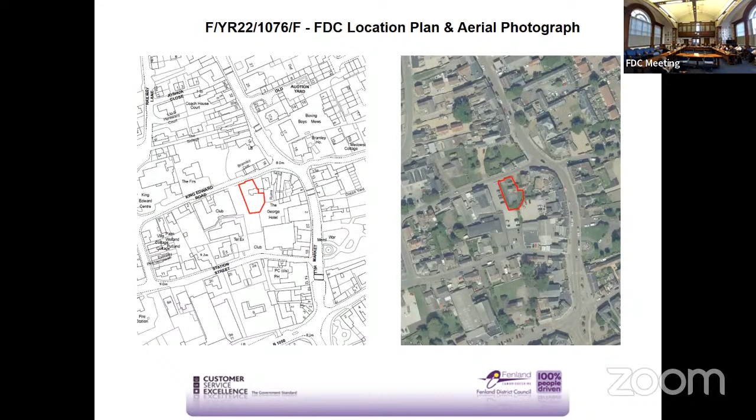It is located in the centre of Chatteris on the southern side of King Edward Road, adjoining the conservation area and within the setting of a number of listed buildings. The former dilapidated barn has been demolished and the site cleared. King Edward Road is narrow and there are double yellow lines preventing on-street parking.

Proposed site layout can be seen on this plan. The dwellings are set back behind parking spaces and therefore significantly behind the established building line on the southern side of King Edward Road. The application incorporates an area of land within the existing boundary treatments, but outside the proposed gardens. This is shown in orange and is indicated as being retained by the applicant to allow access to boundaries and other properties.

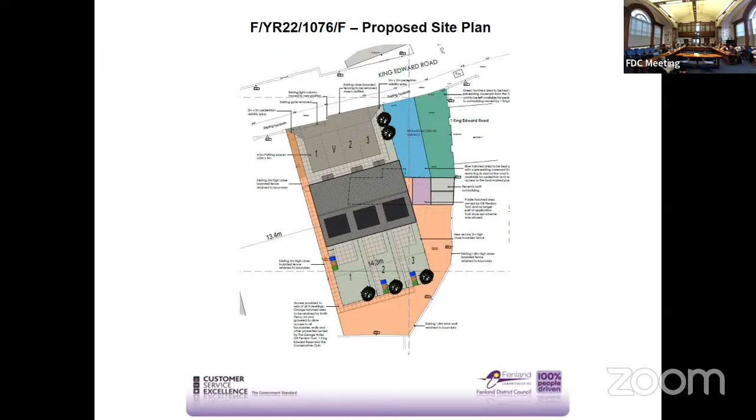Proposed elevations are detailed on this plan, and the proposed floor plans here. A proposed street scene has been submitted detailing the dwellings in relation to 1 King Edward Road to the left and the Conservative Club to the right. It should be noted that the proposal is higher than number 1, and previous schemes have been successfully negotiated to reduce the scale of frontage development.

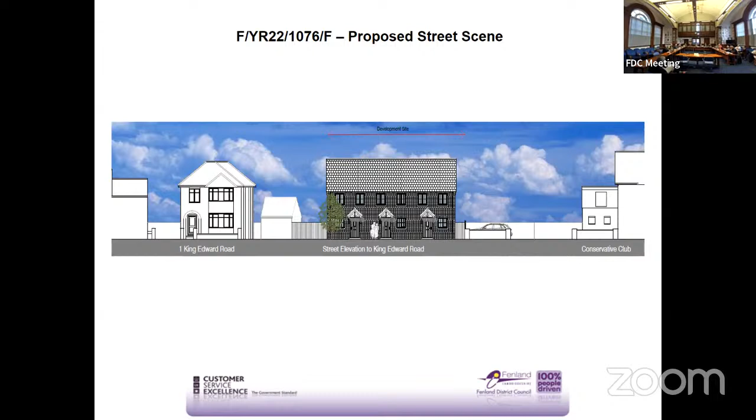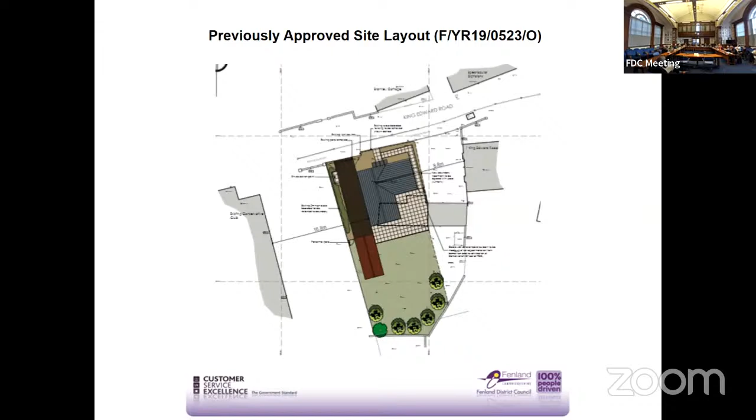The layout of the previously approved outline planning permission is detailed here, indicating an acceptable scheme for redevelopment of the site can be achieved.

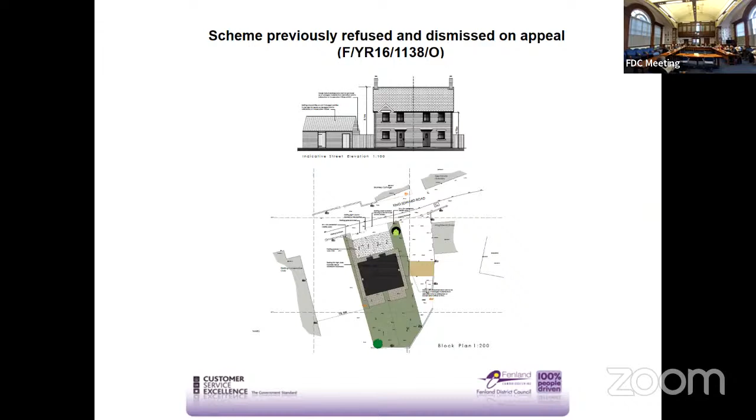This is the most comparable previously submitted scheme, which was refused and dismissed on appeal on the grounds that the loss of boundary treatment and sense of enclosure to the lane and the dominance of parking for 4 cars on the open frontage of the site would materially harm the character and appearance of the conservation area and setting of listed buildings. A comparison between that scheme and the current submission can be seen here.

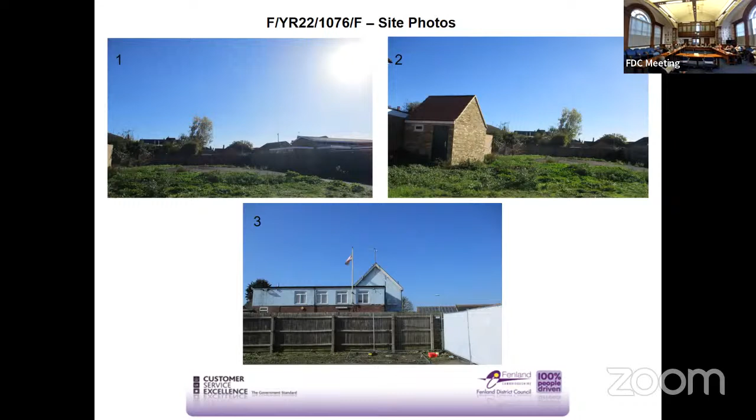Photo 1 shows the western side of the site. Photo 2, the brick outbuilding and its relationship to the site. And photo 3, the side elevation of the Conservative Club viewed from the site.

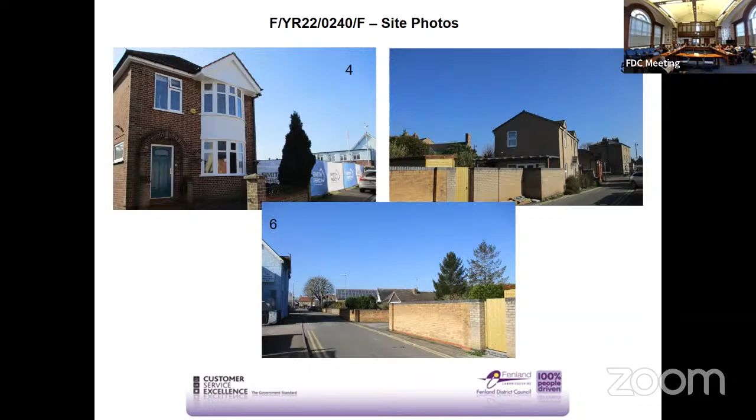Photo 4 shows the site between existing buildings. Photo 5, Bramley Cottage on the opposite side of the road. And 6, the narrowness of King Edward Road and its character of boundary walls.

The principle of development is supported and established, and redevelopment of the site has the potential to have a positive impact on the character of the area, subject to a suitable scheme being put forward.

However, the proposal results in a parking-dominated, open-fronted scheme, which would disrupt the flow of the prevailing frontage development and the sense of enclosure along King Edward Road, and introduces a scale of built form not in keeping with the area, which will materially harm the character and appearance of the conservation area and the setting of nearby listed buildings.

Furthermore, there is an under provision of on-site parking. The recommendation is therefore one of refusal, as set out on page 43 of the agenda.

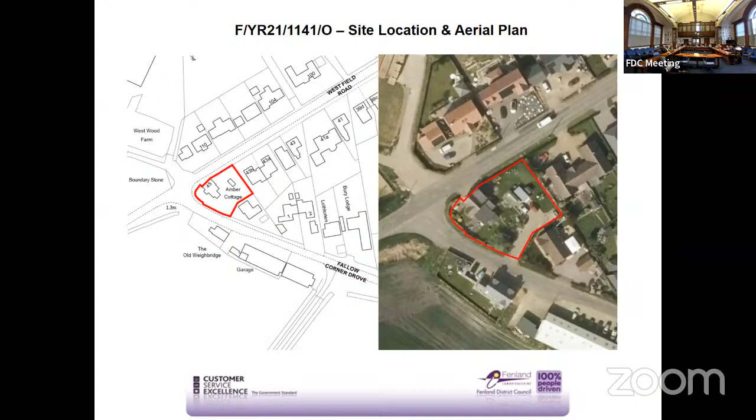The slide currently on display shows the existing dwelling and its detached garage in both plan and aerial view. The proposed scheme is illustrated on the current slide. This is an outline planning application with all matters reserved, but it is clearly demonstrated that the site can accommodate the quantum of development proposed. The current slide shows the existing dwelling and associated land.

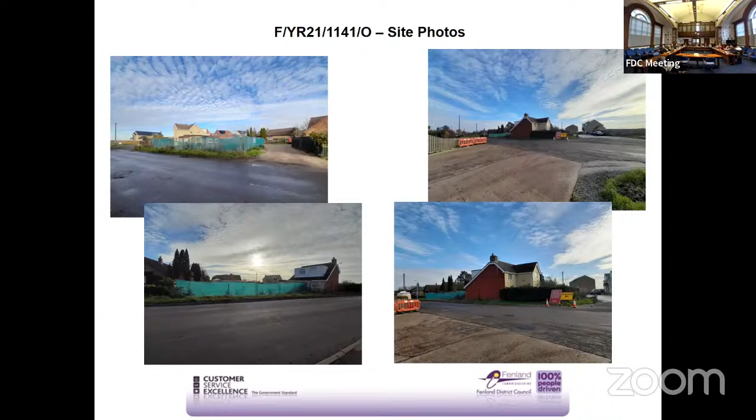The upper left-hand image shows the view from Fallow Corner Drove with the existing access to the southwest of the dwelling. The right-hand images show the site from Westfield Road taken from the access to West Wood Farm. The lower left-hand image shows the site frontage to Westfield Road. As can be noted from the officer report, it is accepted that the site could accommodate the level of development proposed when considered in terms of character and residential amenity, subject to detailed design.

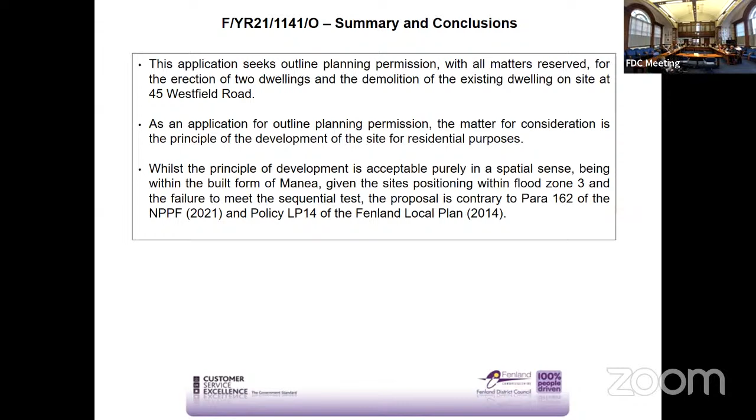However, the site is located in flood zone 3, and accordingly it is necessary to demonstrate that there are no sequentially preferable sites which could accommodate the development. In the case of this application, the sequential test has not been satisfied, as there are extant consents in areas of lower flood risk within the settlement of Manea which can accommodate the additional dwelling proposed by this application. As such, the proposal is recommended for refusal in line with both local and national policy.

Thank you, Chairman. Yeah, thank you, Alison. We have one speaker on this application. I'd now like to invite Ian Gowler, he's of course the agent, to make his presentation to the committee. You've got 5 minutes. Thank you.

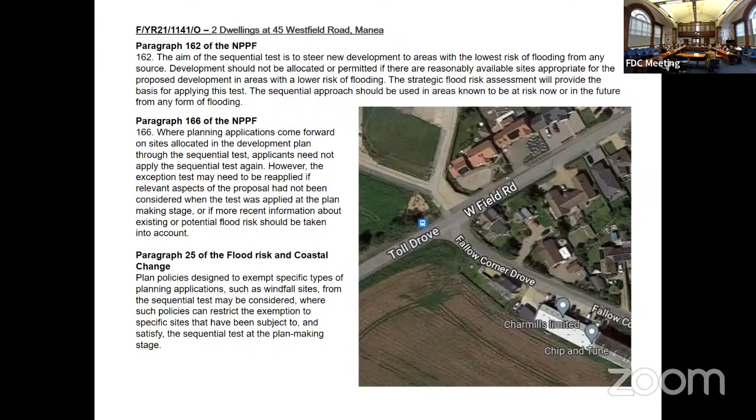This is also part of local plan policy LP12 Part A, subsection A, as an infill site. Under both these policies a sequential test would not be required, but only subject to an exception test, which was provided.

Under the emerging local plan, which is in its very early days, this site also falls within the proposed development area boundary of Manea. Under the new local plan, windfall sites would provide 1,500 homes. Although this site only adds one, they all count.

In recent years there have been dwellings approved opposite and to the northwest, both in a worse flood zone area than shown. Within the exception test we've provided, we're proposing two important items which would fall in line with the windfall guidance. These are improvements to the existing site, providing a wider community benefit. The first is to provide attenuation for the surface water from the site. At present the existing hard paving and dwelling goes unattenuated into an existing surface water drain. Obviously the new development would improve this situation.

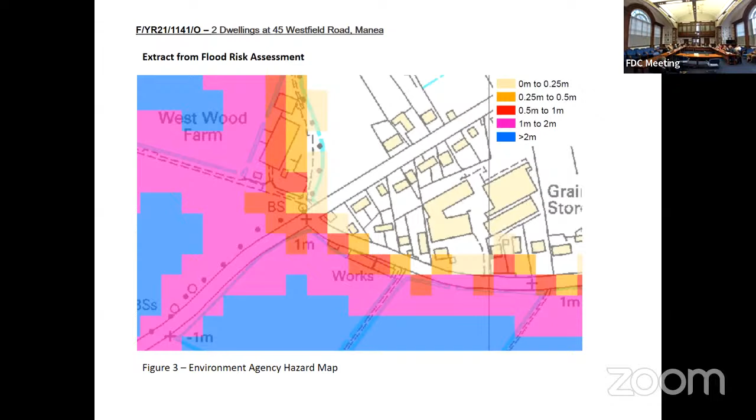Would you like to come back, Councillor? Yeah, I just would like to come back on that because, to me, that sounds ridiculous, to be perfectly honest with you. And if that's going to happen, the people that already live in those new houses will want to open their front and back doors because it will run down that road and down, it won't stop there where that building is going to be. It won't stop there at all. It won't flood there, it was way above the height of the road and going out into the countryside.

Yeah, I do tend to agree with you, Councillor Murphy, but anyway, still in debate. Councillor Sutton, thank you. Yeah, thank you, Chairman. I understand why the officers have recommended this, they have no choice, because that is what's in the textbooks. I do think this is slightly different because it's replacing a dwelling which is actually in the deepest potential flooding on the site.

I don't like the layout. I don't like the 2-story. I would prefer to see single story with perhaps some escape route into the roof space. But...

You've heard me often say about being consistent, and I think to be consistent we have to overturn officers as much as sometimes we regret doing that. We agreed for the dwellings the other side - the one that's already built, I think, was done under delegated powers, if my memory serves me correctly. And of course the one the other side of the road was also in flood risk 3, and we agreed that should go ahead because of the benefits to the business owner. So I think it will be difficult for us as members to go with the officer's recommendation on this one, given that we went against them on the opposite side of the road.

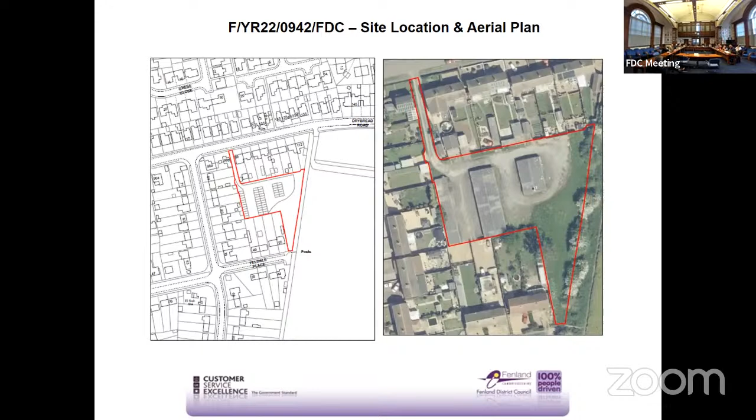The current slide details the site in both plan and aerial form. An illustrative site plan has been submitted which demonstrates how the quantum of development proposed under this application could potentially be delivered on the site. No details are, however, committed, and these would be dealt with via subsequent reserved matters should outline planning permission be granted.

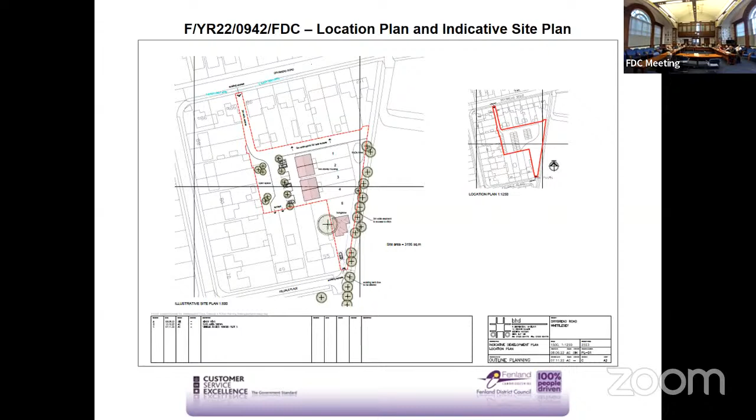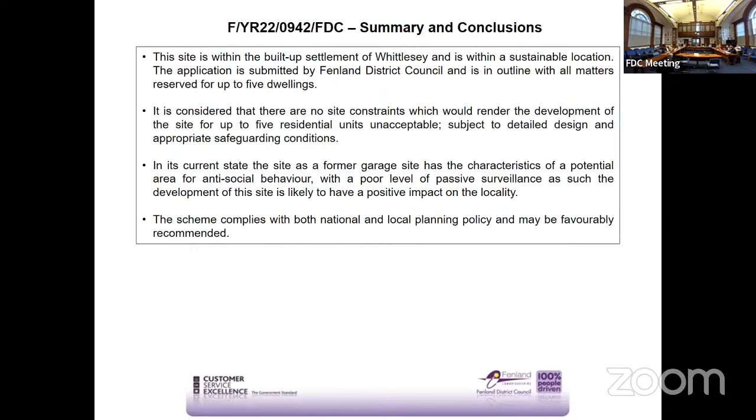The submission is before Planning Committee solely as a result of Fenland District Council being the applicant. Thereby, consideration falls outside the scheme of delegation. There are no unresolved issues that would render the scheme outside policy, and as such, the recommendation is one of grant. Thank you.

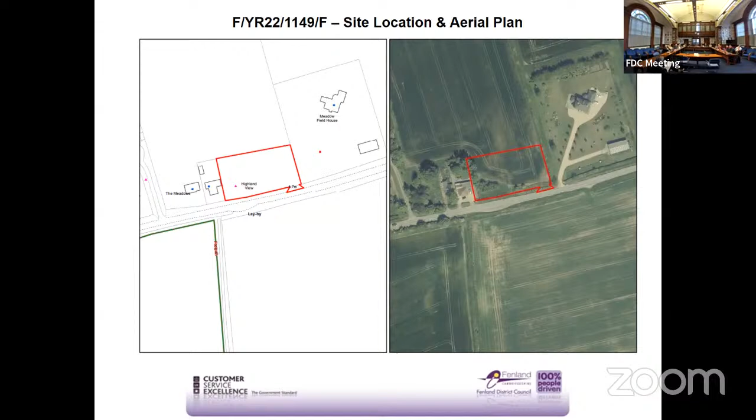The current slide shows the site in both plan and aerial form. As indicated in the officer report, the site lies approximately 1.3 kilometres to the west of Doddington within an area of open and generally undeveloped arable farmland interspersed with sporadic development, primarily the Fields End leisure tourism site and horticultural nursery, along with some ad hoc dwellings. For context, the following slide has been produced.

The application site is located at the red star, with the figure 8 to the west being the Fields End water site and the large grey structure to the east being Delfland Nurseries. Members are advised that of the approvals granted within the wider area captured on the aerial image, 4 dwellings were approved with occupancy restrictions, 3 were replacement dwellings. Permissions relating to 15D, 60 E to G and Askham Row were all committee overturns. 2 of the dwellings that were approved predate the current local plan, and 1 decision was made where weight was given to emerging policy and localism, and the absence of harm gained officer support.

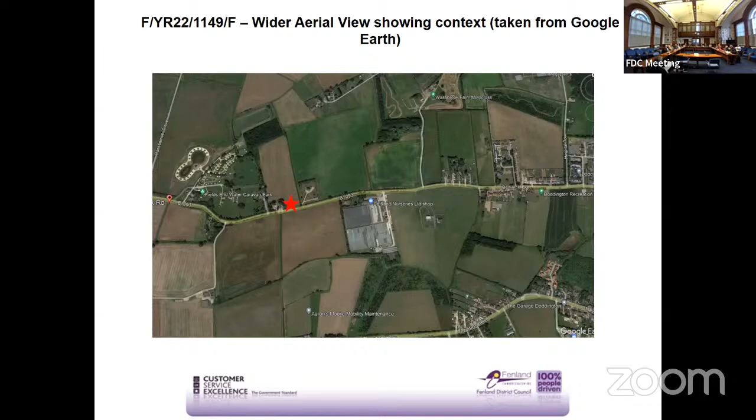The submitted application seeks full planning permission, and the current site plan shows the intended layout: 3 detached dwellings are proposed with field access to the east of the site. As indicated in the officer report, the form of development, notwithstanding that the site is an elsewhere location, would be to the detriment of the character and appearance of the area, and is also considered at odds with the dwelling known as Highland View, which would be dominated by dwellings to each side.

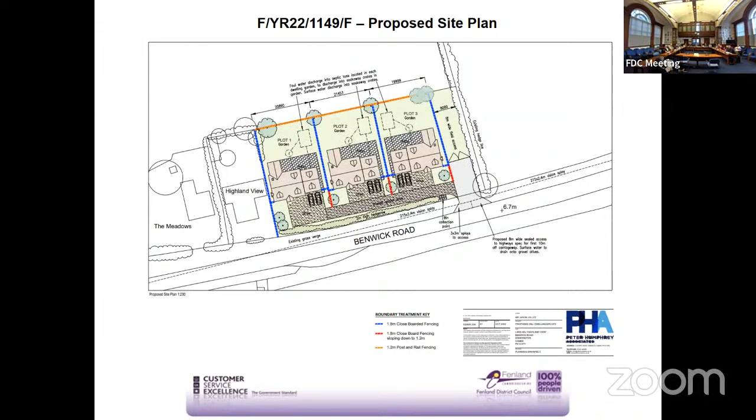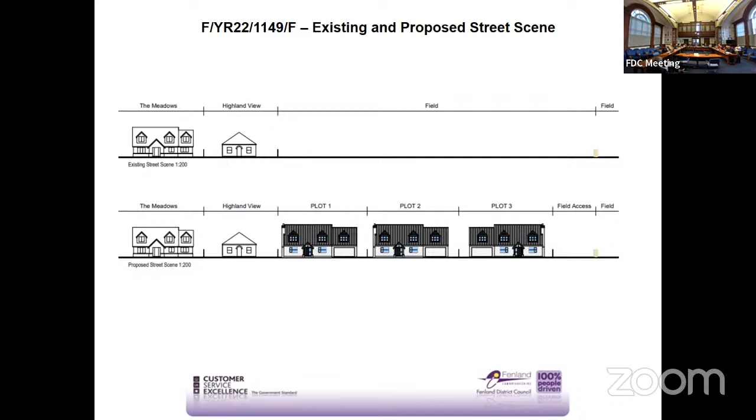The current slide shows the dwelling design, with plots 1 and 2 being as displayed and plot 3 being a handed version of the same dwelling type. This street scene view clearly illustrates the impact the development would have on the rural area in character and visual terms, and shows the dominance of the existing bungalow Highland View that would arise following delivery of the scheme if approved. The upper left-hand image shows Highland View, with the remaining images capturing the longer range view to the site frontage and beyond. Meadowfield House can be seen in the distance on the lower right-hand image.

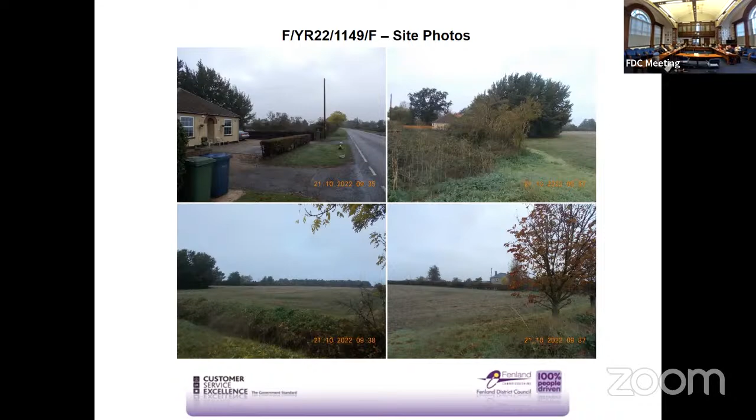To summarise, the application site comprises agricultural land on the northern side of Benwick Road, approximately 1.3 kilometres to the west of the settlement of Doddington. Apart from the occasional sporadic dwelling, horticultural nursery, and Fields End leisure and tourism site, the site is characterised by open and generally undeveloped arable farmland. This application seeks full planning approval for the erection of 3 two-storey, 4-bedroom dwellings with the formation of an access to the east side. The access is proposed to be shared by the proposed dwelling and will form a field access to the agricultural land at the rear of the site.

This proposal was preceded by an earlier outline application for a similar scheme. This was refused on the basis of the principle of development, its impact on countryside character and highway safety. That 2021 refusal went before the chairman and was refused as a delegated item. Of the 3 reasons for refusal of the earlier outline scheme, this revised proposal only addresses one of them, that being highway safety. There remain fundamental issues in respect of the principle of development and its impact on the character of the countryside, remaining in contravention with policies LP3, LP12 and LP16. Hence, the recommendation remains one of refusal.

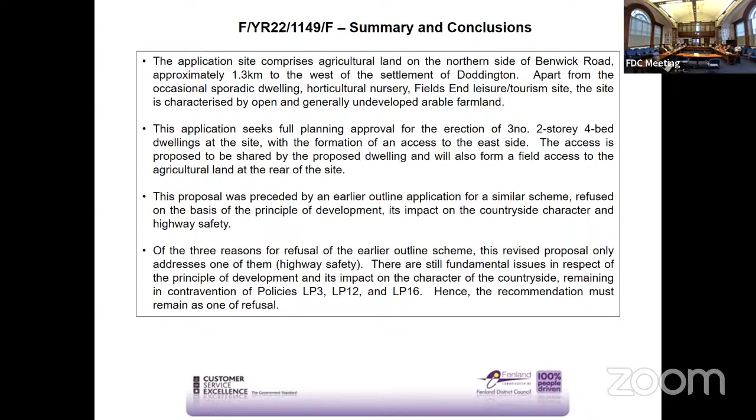Thank you, Mr. Chairman. It's good to see you all again and wish you all a happy Christmas. I'm pleased to see the application at Manea was a common sense decision - we're looking for one here. Basically, there's an opportunity to provide 3 self-built plots. We know from our profession there is a big shortage of self-built plots, and Doddington being a growth village, this will help in a small way deliver some self-built plots, because I know the client has got people wanting to buy them. The site will enhance this edge of village development, and it is close to the adjacent Askham village community and very close to a village of holiday lodges.

Whilst this may not be in the village, it is very close to an approved village next door. It has dwellings both left and right, making it very difficult to farm. Hence the reason Mr. Jolly is looking to develop the land, because it's in fact a useless piece to farm at the front. Yes, it's difficult enough at the back, but the front is small and very difficult to work.

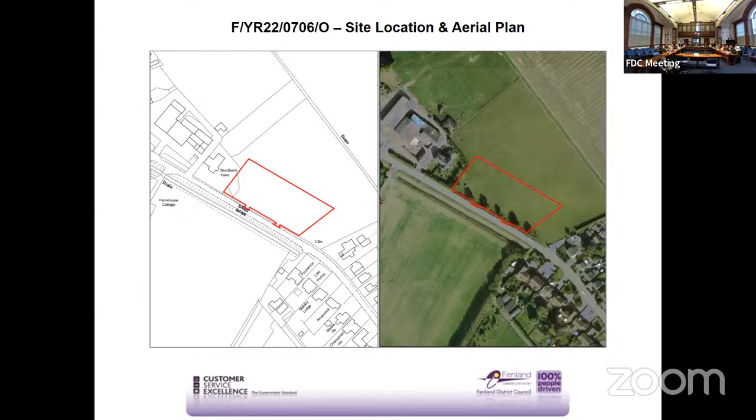An indicative site plan accompanies the application, albeit all matters are reserved for later consideration other than the access. The illustrative details show a linear development to demonstrate how the quantum of development could be accommodated. Within the officer report, context is provided, noting that the development would extend ribbon development on land that presents as agricultural and affords a natural distinction between the developed built form of Wisbech St Mary and the open countryside beyond, save for the sporadic development to the northwest.

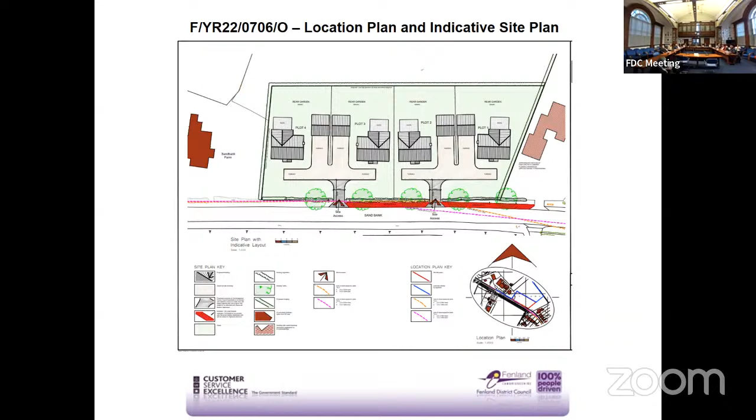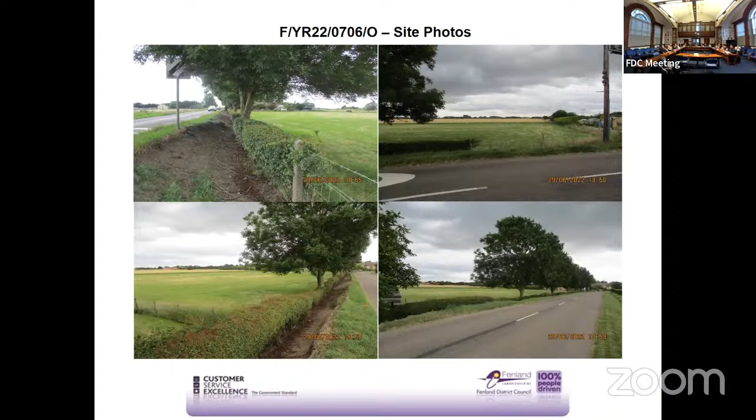In summary, the application seeks outline planning permission for the erection of up to 4 dwellings on agricultural grassland in flood zone 3 on the east side of Sandbank, Wisbech St Mary. The application commits matters of access, with remaining matters reserved for later approval.

Whilst Wisbech St Mary is a growth village as identified in policy LP3, the application site would extend the existing linear feature of the development footprint of the settlement into an area of agricultural grassland. This area of grassland at the site is mirrored by agricultural land opposite, which forms a natural demarcation between the developed built form of Wisbech St Mary and the surrounding countryside beyond. Development encroaching into this land would harm the character and appearance of the area. As such, the proposal would be contrary to the requirements of policy LP12.

Flood mitigation measures proposed the raising of finished floor levels to 1 metre above ground for the entire development, which would result in cumulative dominance of the development within the street scene. Matters relating to access have been satisfactorily addressed. However, there are still fundamental issues pertaining to the principle of development and its harm to the rural character and street scene in this location.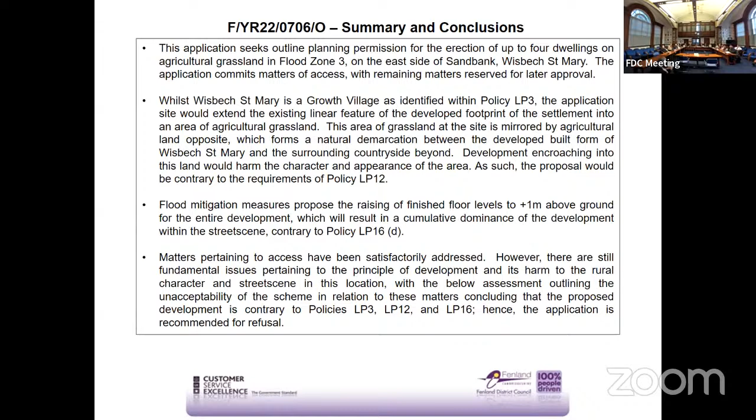The scheme is considered unacceptable in relation to these matters and contrary to policies LP3, LP12 and LP16. Hence, the application is recommended for refusal.

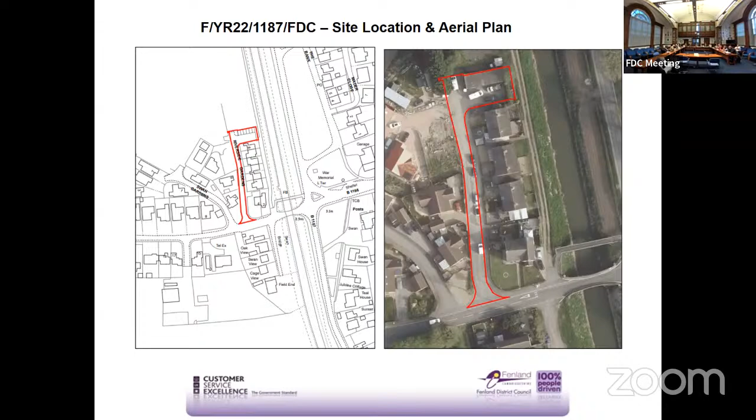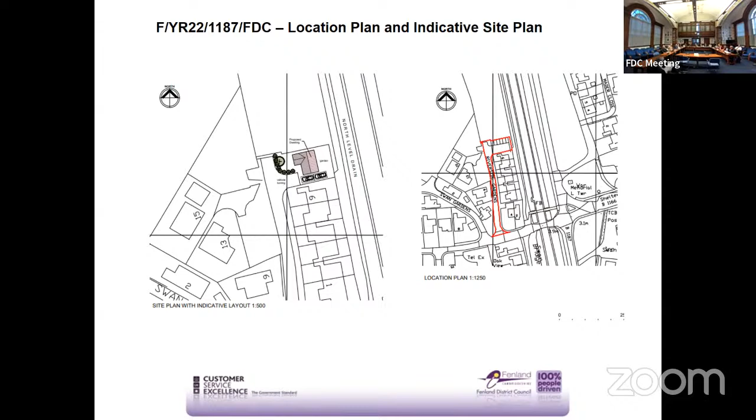This is an outline application with only access committed, with this being derived via the existing roadway, which serves the existing garages and the residential properties to the south. As indicated in the officer report, there are no policy issues arising and the site can accommodate the quantum of development proposed. Matters relating to residential amenity and design will be addressed as part of any subsequent reserved matters submission.

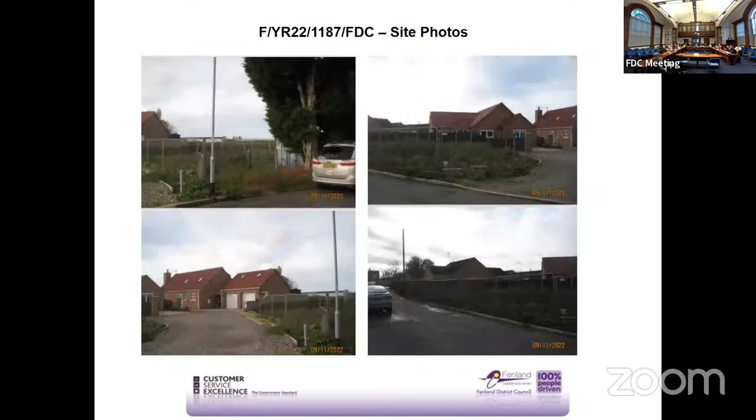These images show the development to the western side of Riverside Gardens.

In summary, the site relates to an existing garage block situated to the north of number 6 Riverside Gardens. The application seeks outline planning permission for 1 dwelling. As the application is for outline planning permission, the matter for consideration is the principle of development of the site for residential purposes. An indicative site plan demonstrates the site is capable of sustaining 1 dwelling with on-site parking and private amenity space, and there would be no adverse impacts on the character of the wider area.

Taking national and local planning policy into account and having regard to all relevant material considerations, it is recommended that outline planning permission be granted, subject to the imposition of appropriate conditions, noting the change to condition 1 proposed and the addition of an access condition to ensure delivery of the same prior to occupation of the dwelling.

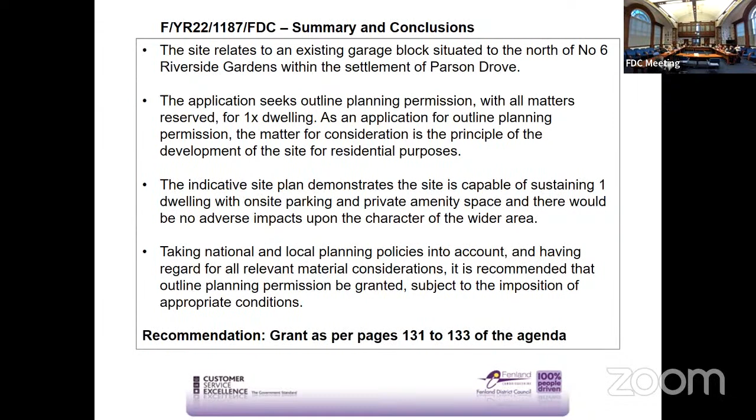Anybody? Councillor Cornwell, thank you. Thank you very much, Chairman.

When we visited the site, we hadn't actually seen the report, but we did very clearly indicate on our visit that the importance of the bottom end, which incorporates this plot, is desperately important in relation to turning and so on. It's a very narrow road. Most of the existing residents along the road seem to park on the road, so there's nowhere to turn. So whatever happens, it is desperately important that whatever is approved gives sufficient space to turn. That issue has actually been picked up by the parish council as well. So perhaps we got that element right, because we did spot it ourselves anyway. It's been further complicated probably because of the other entrance onto the road on the riverside from the other development on the other side. So I think it's important to stress that whatever we do, if we approve it, it has to incorporate very strict controls over the access and turning for the remainder of Riverside, not just this plot.

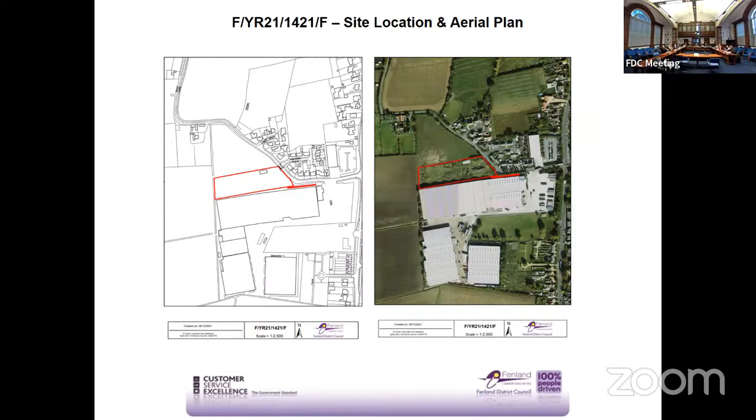2-metre fencing is to be provided to the boundary of the site, largely inside the existing boundary planting, and within the update report, members will see that there is a further condition regarding the provision of a fence to the eastern boundary, the Blue Lane boundary of the site. The hedge along the Blue Lane frontage of the site is also to be retained, and as the parish council have indicated, I would just draw members' attention to the dwellings on the opposite side of Blue Lane.

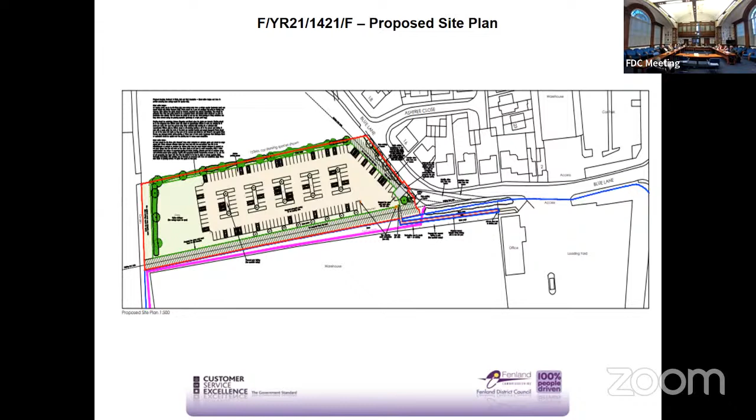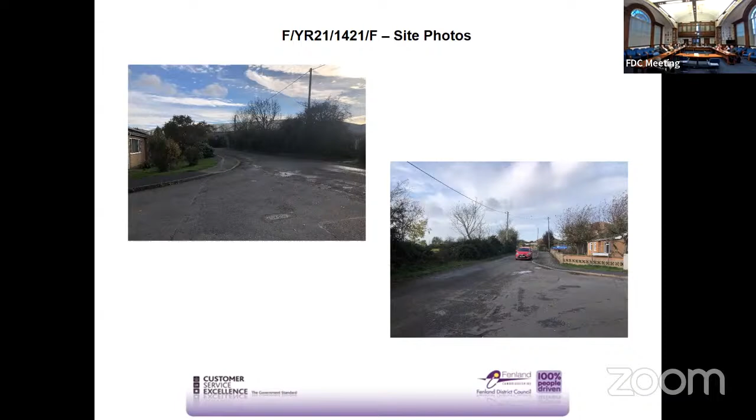It is considered that the development would impact on the amenity of neighbouring residents. However, this is not considered to be to such a level to justify refusal. There are no technical objections arising from environmental health or highways upon which a refusal could be sustained. It is not considered that the character of the area would be significantly adversely affected, and there would be some economic benefits to the business from the development proceeding.

Consequently, the officer recommendation is to grant planning permission as set out within the agenda and also within the update report. Thank you, Chairman.

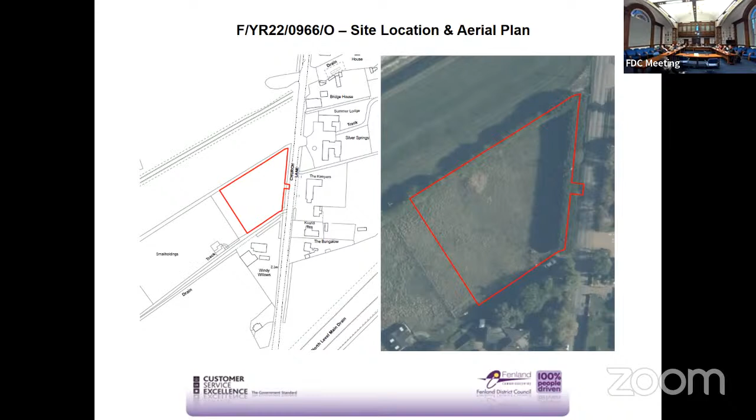The application site is shown in red on the location plan and aerial photo. It's a green field location with sporadic development in the vicinity. There have been 2 previous applications refused for 3 dwellings on the site, the most recent being at Planning Committee in 2013.

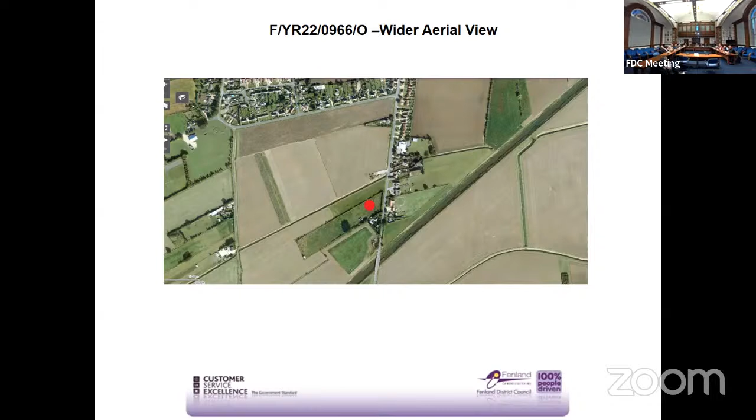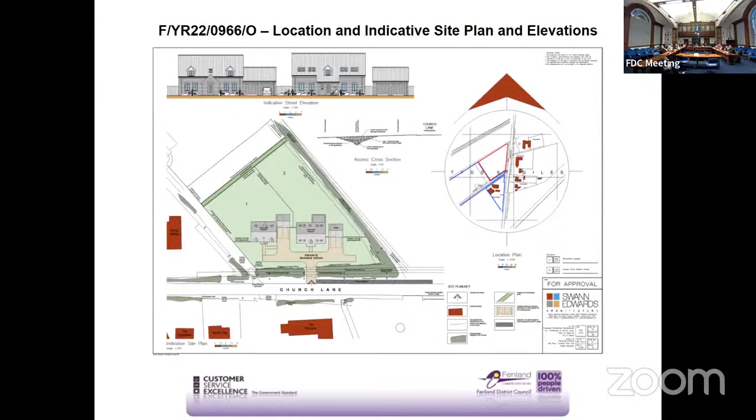To summarise, the site is considered to be outside the built form of Tydd St Giles and as such is within the open countryside. Tydd St Giles itself is classed as a small village within the settlement hierarchy of the local plan, where only small scale infilling will be allowed. The development by its nature and the nature of the site does not accord with the relevant planning policies in terms of the principle of development.

Given the nature of the site and its separation from the built form of the settlement, it's considered there would also be harm caused to the character and appearance of the surrounding area. The site is located in flood zone 3 and should be demonstrated as being sequentially acceptable. No meaningful sequential test has been submitted with the application, and as such the application fails to meet local and national policies in this respect.

In addition, the Highway Authority have commented that no details of acceptable visibility have been shown on the plan and therefore raised an issue in that regard, a further reason for refusal recommended. As such, the application is considered to conflict with a number of policies of the local plan and of the NPPF, and the recommendation is therefore to refuse planning permission as set out within the agenda. Thank you, Chair.

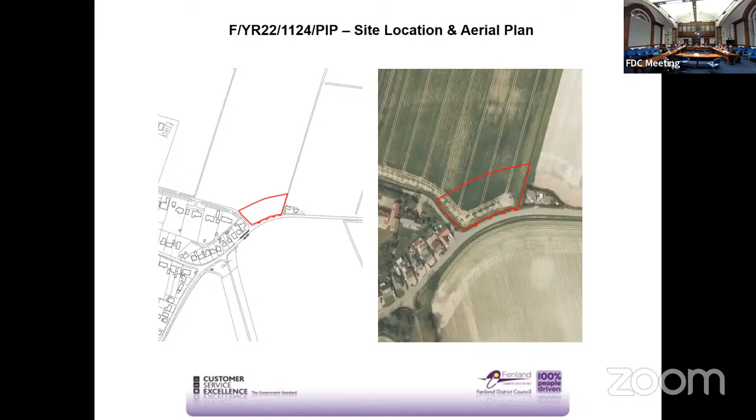Thank you, Chairman. So this is a planning application in principle for residential development of up to 4 dwellings involving the formation of 4 new accesses, land west of railway carriage, Needham Bank, Friday Bridge. The application site is shown in red on the location plan and aerial photo, forms part of a wider agricultural field at the junction of Needham Bank, and then Bar Drove to the west. To the east is the residential property of railway carriage, and a significant proportion of the site is within flood zone 2.

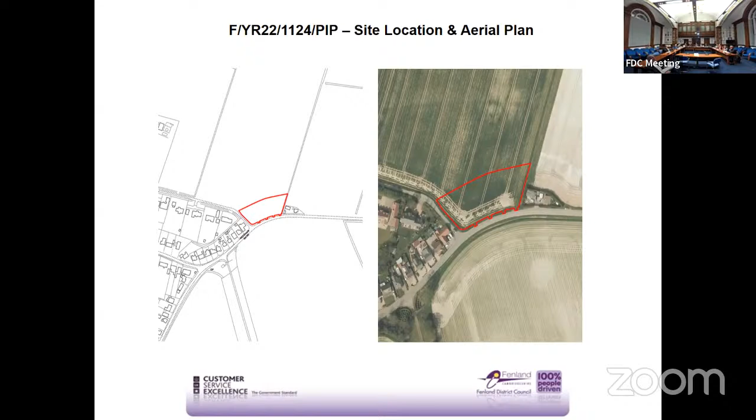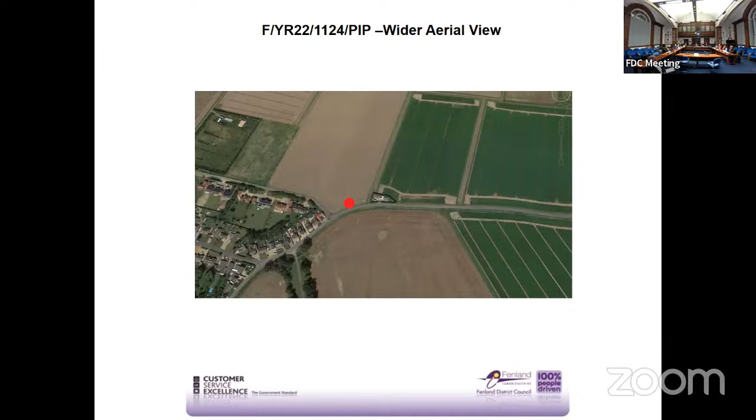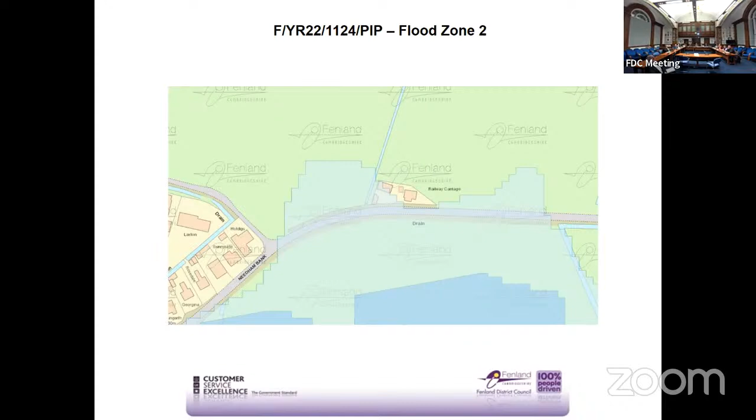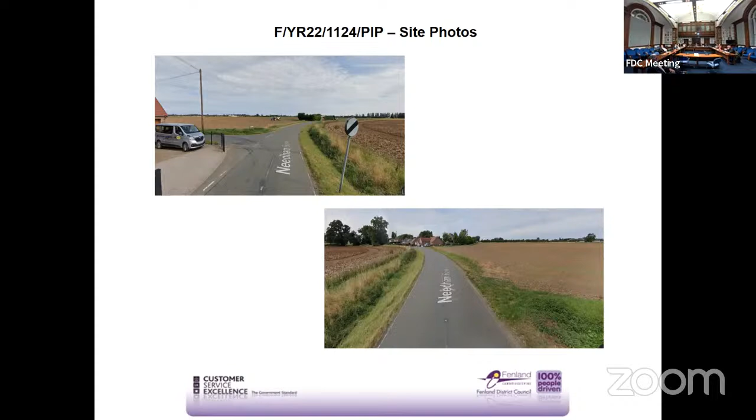So, as with the preceding application, only 3 matters can be considered when determining a PIP application: location, use and amount. It is considered that the development is outside the core shape and form of Friday Bridge, and that the principle of development of the site for residential purposes would have a detrimental impact upon the open and rural character of the area. In addition, a significant proportion of the site is within flood zone 2, with planning policies requiring development to be located within areas at the lowest risk of flooding. No sequential test has been undertaken, and as such, the development has not been shown to be sequentially acceptable as required by both local and national policy.

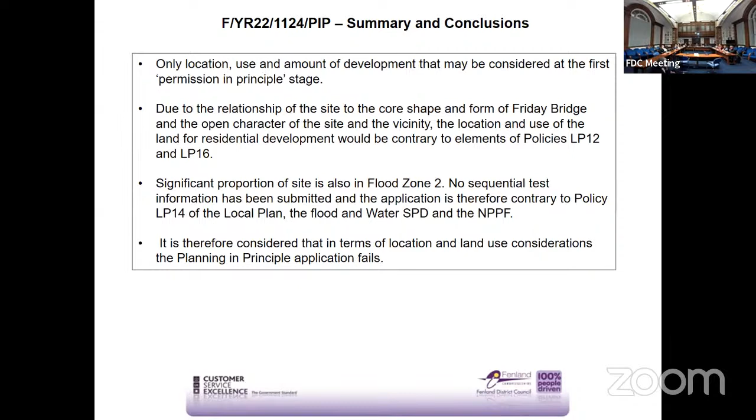As such, the development would be unacceptable in terms of location and use, and therefore contrary to the relevant policies of the local plan. The recommendation is therefore to refuse as set out within the agenda. Thank you, Chair. Thank you once again, David.

We have the same speaker on this application, Mr. Peter Humphrey. Would you like to come and make your presentation? Again, of course, you've got 5 minutes. Thank you, Mr. Chairman, I've got an overhead on this one as well, Mr. Chairman.

Okay, absolutely fine. If I can just explain the benefit of PIP applications as far as we're concerned. I know Councillor Murphy's not keen on them, but they are better than a pre-app.

We get a formal recommendation and we don't have to spend thousands of our clients' money to find out whether it's worth putting an application in or not. And they're very quick. Compliments to the planning officers, they turn around decisions quickly. So from our perspective, we do like PIPs. It's gone back to the olden days where you had a red line around a piece of land and the planning department would give you a decision in outline, but it's now called a PIP.

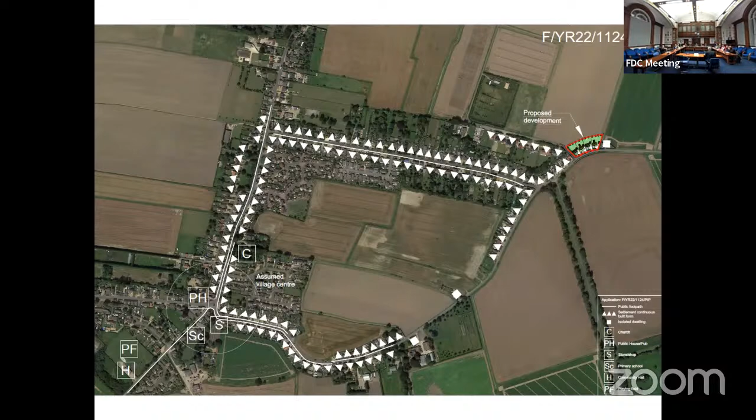Do I hear some laughter in the... anyway, never mind. We'll move on.

Questions, clarifications to Mr. Humphrey, please, members?

It's not such a bad day. You're not going to be grilled again, are you? Sorry, Councillor French, sorry, I missed that.

Sorry, Mr Humphrey, are we getting a footpath? No, can't do it on a PIP. Okay, very good. Any more questions for Mr. Humphrey? No? Okay, thank you.

Questions to officers, members? No? Debate the application, members?

Councillor Cornwell, thank you. Well, I'll kick off and say that I really do think this is intrusion into the open countryside, to be quite honest. I think we have a built form that finishes at the road junction to the southwest. I think the fact that there's one of these very isolated infill settlements just beyond it, and that this is a piece of infill between the two, doesn't bear water as far as I'm concerned. That is a development that's going out into the open countryside and extending the village when there would appear to be plenty of building opportunities at some stage anyway, somewhere within the existing built structure of the village.

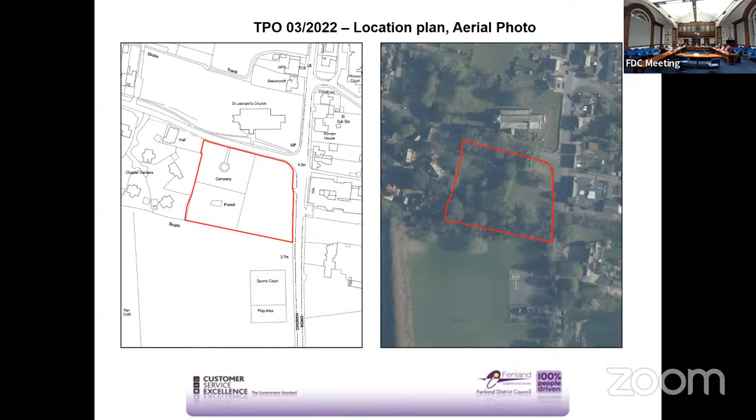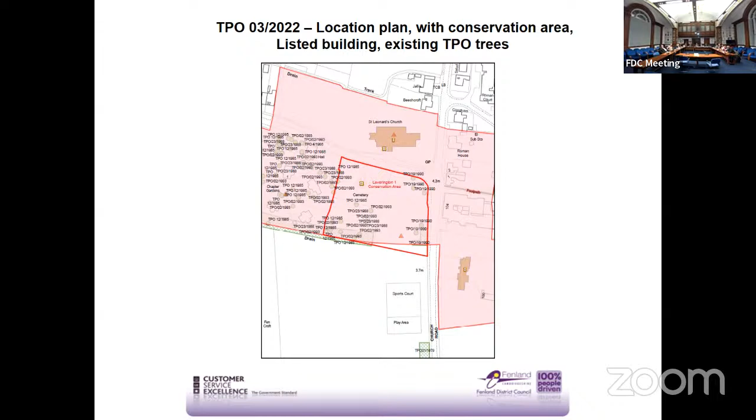The site is shown here in the context of the conservation area, shown in pink on the screen, and also the adjacent listed buildings. On this plan you can see a number of individual points which denote existing tree preservation orders. The plan also shows the trees proposed to be removed under the previously submitted applications, both for works to trees in the conservation area and works to TPO'd trees.

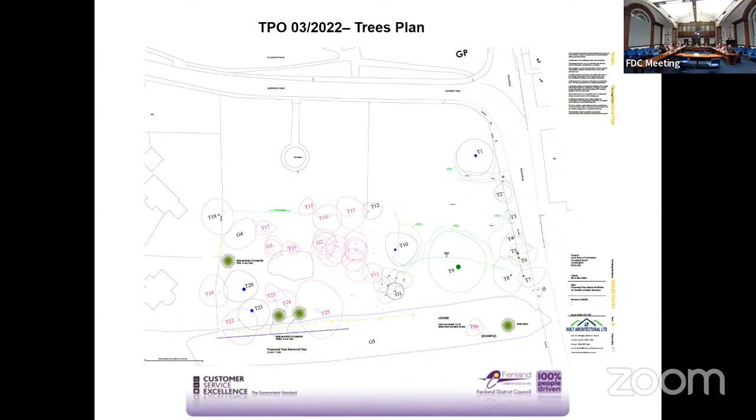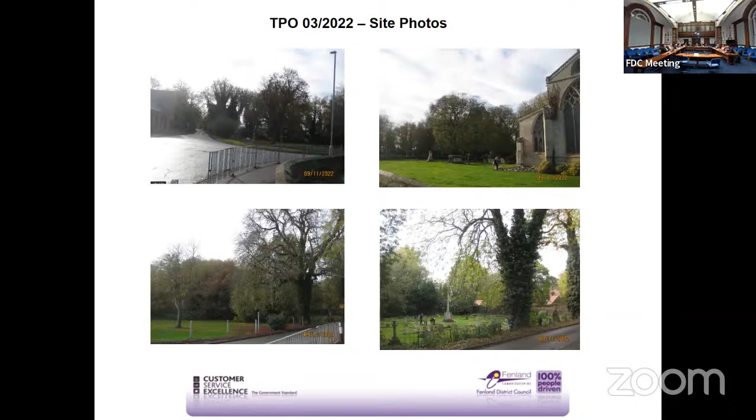Moving on to the photos on screen, these show various views of the trees adjacent to the church and in the wider area around the cemetery. I think the cumulative contribution that these make to the amenity of the area is significant.

To summarise, an application for works to trees in a conservation area was submitted earlier this year, applying for consent for the felling of several trees. To safeguard those trees, given the time limited nature of such an application, an emergency tree preservation order was placed on the trees to prevent any works taking place. The council's arboricultural officer has subsequently advised that the works to several of the trees are unjustified, that the trees in question contribute to the amenity of the area and are worthy of a TPO being made, and also that any trees removed should be replaced.

An objection to the tree preservation order has been received from the agent for the application for works to trees in the conservation area, on the basis that further protected trees would hinder the wider management of trees within the site. As seen in the history section of the report, there have been several applications for works to protected trees in the vicinity granted in recent years. But because those trees are protected by tree preservation orders, the council has been able to require replacement trees to be planted. It's therefore recommended that committee confirm the proposed tree preservation order.